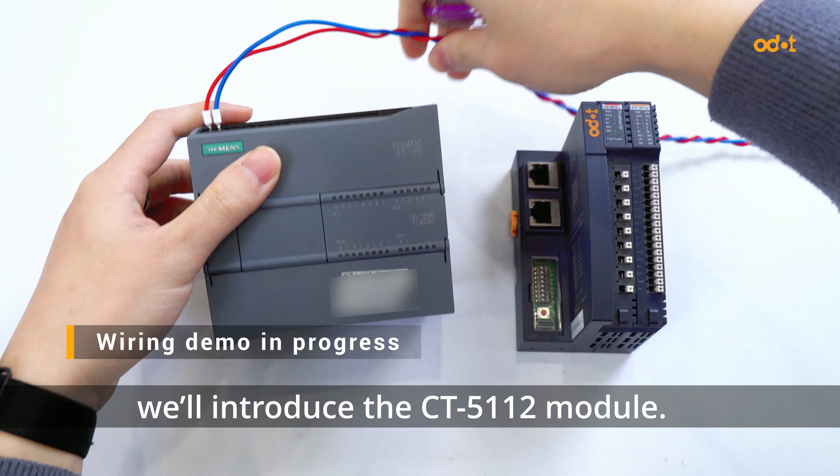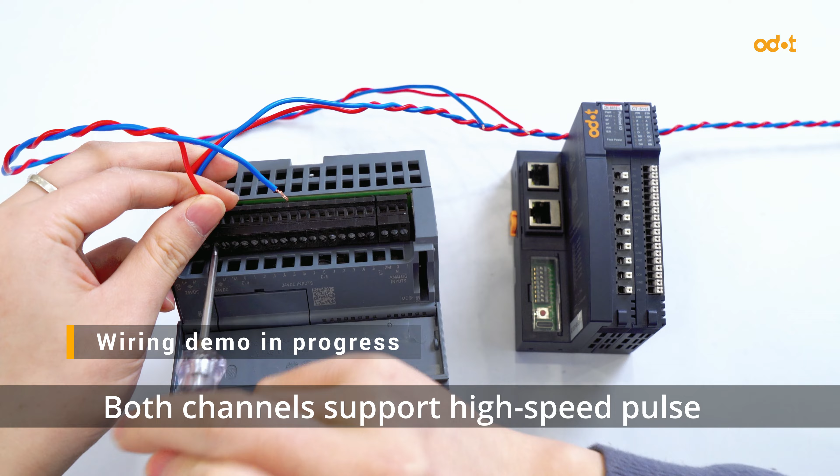Hello, everyone. Today, we'll introduce the CT-5112 module. The CT-5112 is part of ODOT C-Series Remote I/O. It's a high-speed counter module with 2 channels. Both channels support high-speed pulse collection for incremental encoders.

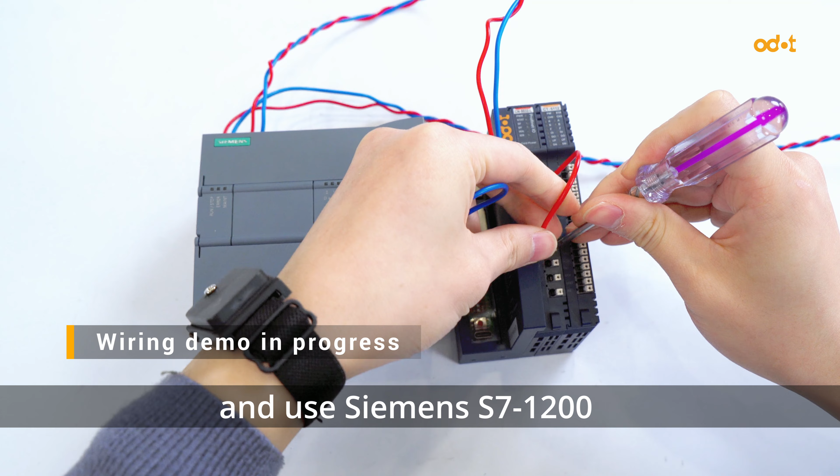This here is the CT-5112 module. Next, we'll pair it with our CN8032L module and use Siemens S7-1200 to demonstrate the wiring setup and provide a step-by-step usage guide.

This is the wiring diagram for our CT-5112. It's a 2-channel encoder input. The top one is for one channel, and the bottom one is for the other. Each channel connects to the A, B/Z signals of the encoder, plus GND, and 24V. At the bottom, there's one DI input and one DO output. The second channel has the exact same wiring as the first one.

Now, let's go over how to use the software. Our platform is Siemens 1200. First, open the TIA portal and drag the CN8032 network adapter into the configuration. Then, find CN8032L in the Profinet IO ODOT and drag it in. Next, select the interface, double-click on the network adapter, and find the CT-5112. Drag it into the window.

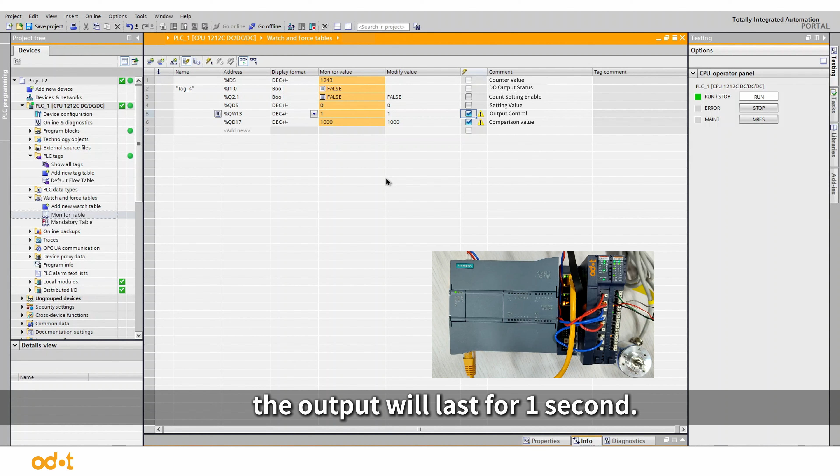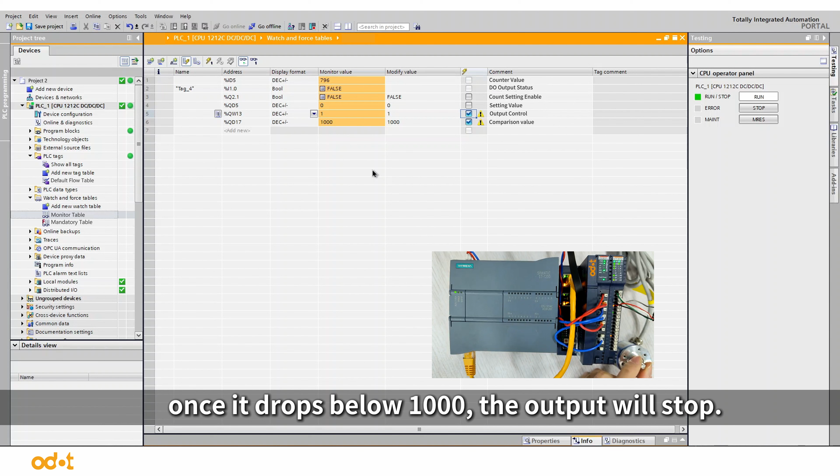First, click offline and select output between the comparison value and the upper limit. Let's change the upper limit to 3000, then click download and start monitoring. Write the comparison value first, then write the output control. Now, turn the encoder, and you'll see that the output will stay on as long as it's between 1000 and 3000, since we set it to stop when the upper limit is reached. Once it drops below 1000, the output will stop. As long as the value stays between 1000 and 3000, the output will stay on.

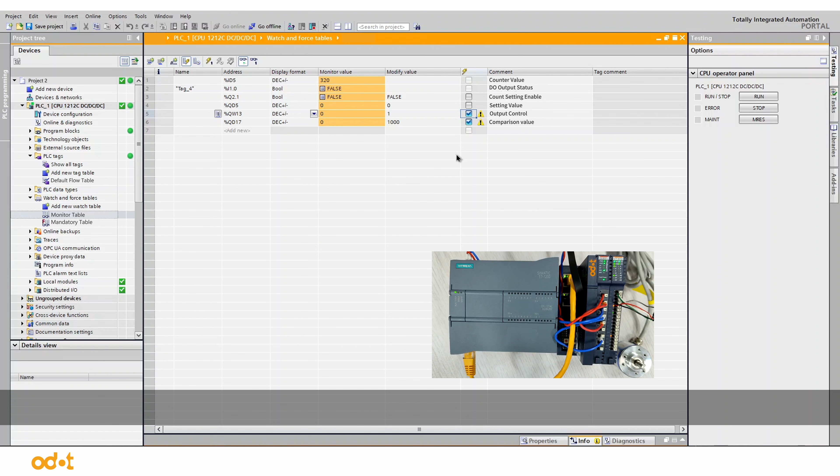Now click offline, and select output between the comparison value and the lower limit. Same process, compile and download. Click to monitor, and change the lower limit to -3000. Click Edit, Download, Complete. And then monitor. Same process again, write the comparison value and output control.

Since the program's value is now below 1000, we're just going lower. You can see that the value stays between 1000 and -3000, and the output will keep going. As soon as it goes above 1000, the output stops immediately.

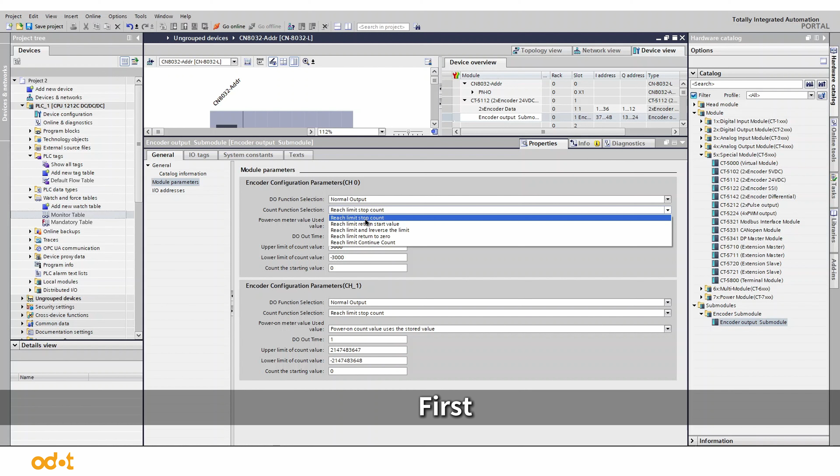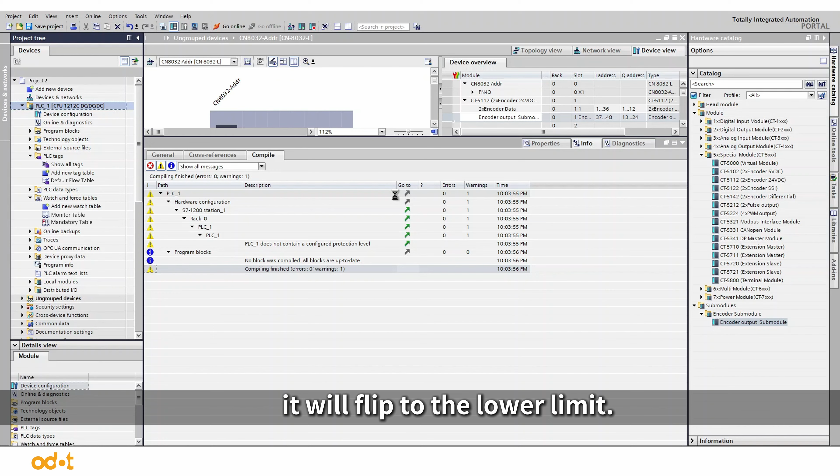The same goes for negative values, click offline, and change it to reach limit value. In this case, when it hits the upper limit, it will flip to the lower limit. When it hits the lower limit, it will flip back to the upper limit. Click monitor, and pay attention, we'll continue with the next steps. When the value reaches 3000, it'll automatically flip to -3000. At -3000, it'll auto flip back to a positive 3000.

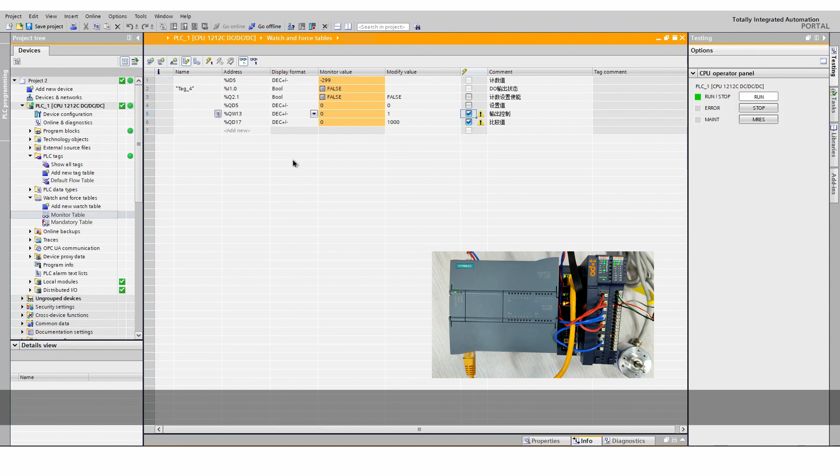Let's go offline and give it another try. When the value hits the limit, it resets to 0 as the base value. Let's move on to the next step. Currently, the value is 3000. Once it hits 3000, the program resets to 0. Then it starts counting again. Let's check the reverse direction. Negative values work the same way. That wraps up today's test.